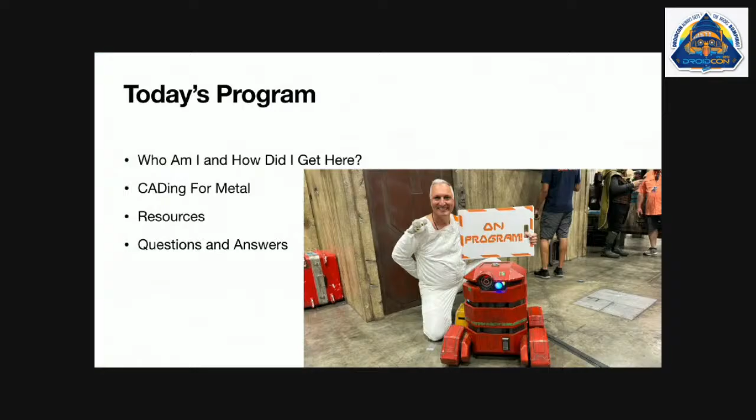All right. So for today's festivities, welcome to DroidCon. Here's what we're going to talk about. Who am I? How did I get here? A little short story just for context in case you don't know who I am. Then we're going to talk about CADing for metal. And then we'll talk about a few resources, and I'll open up for questions. So check your Yelp reviews.

So I started building droids back in 2018. 25 years in the Air Force. I'm currently flying for United Airlines. No affiliation with either of those two organizations, but I've got no business building and creating and designing droids. I have no background in it at all. And I say that because if you are a mechanical engineer and the stuff I'm saying up here doesn't make sense, that's not my fault.

But in the same breath, my message there is if you put your nose to the grindstone, you can learn the essential tools necessary to create your own designs. Don't be intimidated by the fact that you don't know how to do it. When I go to schools, I have 3 messages. I'm curious, I'm not afraid to make mistakes, and I don't give up. So if you apply those 3 facilities to droid building, you can get where you want to go. And the last one is the most important, don't give up.

So try, fail, learn, move forward, ask questions. There's a great community out there to support this, and that's produced me here today as a non-expert talking as an expert. So a little bit about my history in droid building. When I started with 3D printed droids, I was a plastic guy, 100% plastic. And why? Because it was accessible and easy to do.

I built R2-D2, the gateway drug to droid building. I took them out to a convention, and it was so much fun that my wife was intending to go to seminars and shopping and all the things you do at conventions, and she couldn't stop watching. And on the way home, she said, next year I want my own droid. So next year, 2019, we built R5-D4, took it to the convention, and then my daughter, who's sitting back there, would steal one of our droids and disappear for hours. So we built Chopper, and then we're having a moment back there.

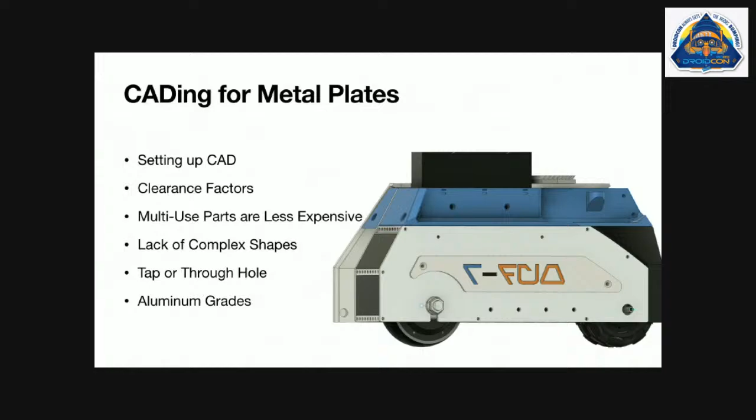So here's what we're going to talk about in the different phases of this. We've got setting up your CAD, and this is all going to be Fusion-centric, which is a very popular but not the only CAD software out there, SolidWorks. I'm sure there's analogs in that software that will apply to what I'm talking about, but some clearance factors that differ from plastic designs or any other material in manufacturing. Talk about making the most bang for your buck by making your parts extensible and reusable in different parts of your design, different characteristics of what parts you can actually make in metal, when should you tap or through hole, and just a little bit of what types of metal should you use or can you use.

And so that's kind of the overview of this next phase here. All right, so CAD setup for Fusion. I'll bring up Fusion here in a second, but I can't stress enough: the most important thing you want to do is make sure you're referencing the right thing.

When I start one of these designs, I have a master, this is the middle of everything. When I mirror, and you will mirror because there's a natural symmetry to droids. It's by definition symmetrical. So when you build something like this, this exact same part is the exact same part over here. Literally, you just build from the other side of it. So in all your designs, you're just designing one half of it, and then you mirror it for the other half. And make sure that plane is the same one every time, because otherwise you may end up with bad results.

I also recommend, and I'll show this in a second, setting up parameters. So when I build, I have chosen my metal thickness, and then I make that a parameter. So when I go to extrude that part, I type in AL for aluminum, and it comes up to 3.175 millimeters every time. That way I'm not making some of them different thicknesses. Again, you're trying to trap your errors in the initial setup.

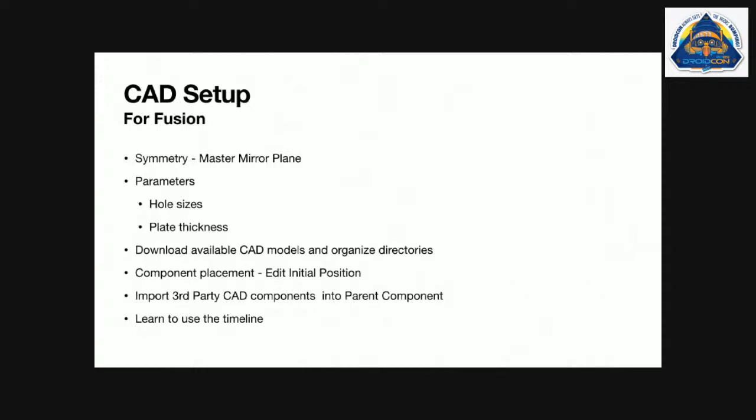Learn to use the timeline, and we'll talk about that here in a second. There's two basic modes of modeling in Fusion. One of them is direct modeling, where you just cut and extrude and go hog wild, and after a long time you end up with the shape you want, and shazam. The other way is to use a timeline where you start off with a drawing and extrude it, and you can go back and reference those things, and if you change your mind, you can change those things. It's very powerful, but if you're not managing the timeline, you'll end up with a big, giant, twisty mess with a lot of errors in it. But that process takes time to learn.

Do it, because at the end of the day, I used to never use a timeline. Now I can't imagine not using the timeline, just because it gives me so much more power when I need to go back to this step and fix it without having to re-drill all those holes, and you just click it and whoop, it fixes itself. And you can also do that with the parameters as part of your build. So with that, let me pull up my Fusion screen.

Yes? Could you go to the component placement one? Yes, that's exactly what I'm going to talk about. So if you can switch over, let's make sure that's on. There we go.

So for component placement, there's multiple ways of putting stuff in space in Fusion in particular. One of them is a joint. Another way is to just simply move it. And the third way is edit the initial position. And of all three, that's the most powerful.

Because when you move something, it creates a move event in the timeline. And then if you subsequently move it again, it creates another move event. And then if you throw a joint on it, that'll capture a position. And next thing you know, that thing is locked down, and you don't know how it got locked, and you can't move it. And the way you avoid all that mess, I'll demonstrate here since we're on that question.

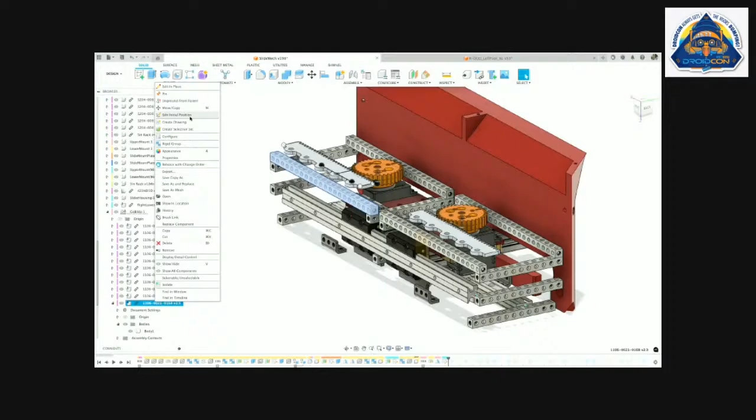So I right-click on it, and I go to Edit Initial Position. What it does is it brings up this Move Position dialog, and what I can do is move this piece and use all my alignment commands to line it up exactly where I want it to go. And then when I hit OK, when it loads in, that's where it expects it's supposed to be in space, where any other way of getting it there is malleable and rife with chance for errors.

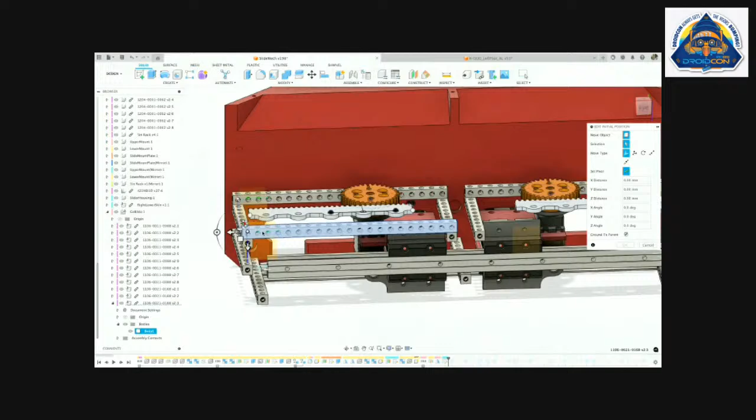And I would spend many iterations moving these bars so they're all perfectly lined up with each other. I'll just demonstrate a quick move here. So what you do is you're going to set your pivot point. You're going to set what part of the geometry you want to focus on. In this case, let's focus on this corner here. Come back and hit the check mark. And now when I slide this around, it's in relationship to that corner.

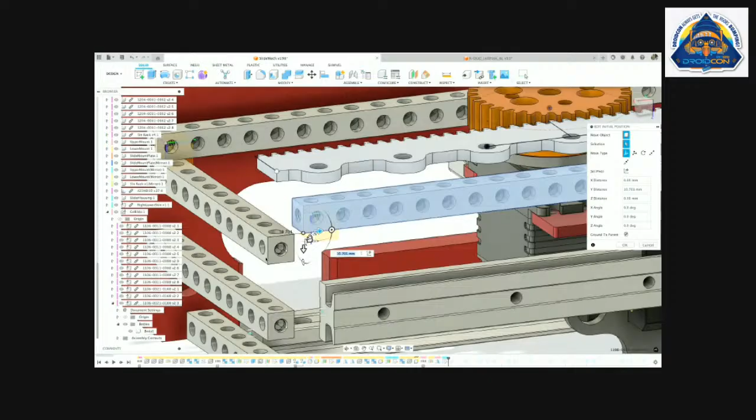And if I want that corner to be perfectly lined up with this face, I got a little dialog box there. Let me just go back. I had that little miss. So if I wanted to line up with, why is it not lining up? Well, I'll just pick another face since it's not playing. It snaps to that face.

And when you do it this way, you can take your first block and stack them into space and make sure that the holes line up. You don't want close to being right, you want exactly right. And you have to be meticulous about that. And the magic of the timeline is if I get one wrong or I change my mind of where that piece is supposed to go, I go back to Edit Initial Position. It automatically rolls the timeline back to when that part was first inserted, and you change it.

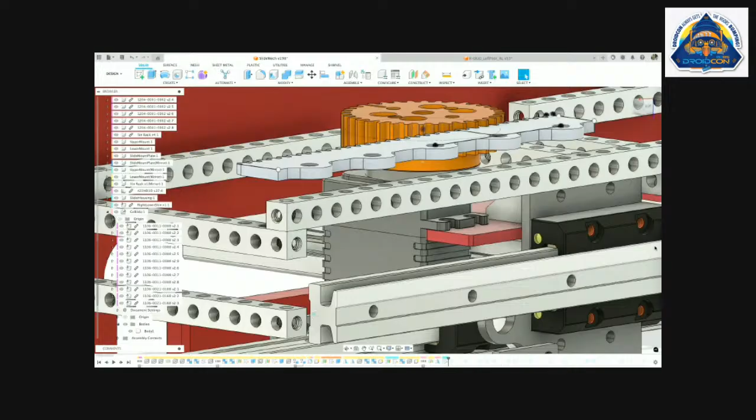And sometimes you may think, oh, I need to base it on a part that I put in later. You can drag when you insert that part in the timeline back before the other one, as long as there's not a relationship locking them. You can just slide those parts around until you can build a competent structure. So we'll go back over what I was talking about in the parameters and the symmetry, I'll demonstrate that, and then we'll move on to the next part.

So for your master mirror plane, if you're savvy enough to start your project in such a way that you can use the origin, that's the best one because it's the origin. And I recommend using that. A lot of people fall into the trap of building their project off of the origin without relation. If you're not thinking about this all going to be mirrored, you build it in a place like half the distance away from where you think it should be. And again, if you need to change it, Edit Initial Position, move all those things into the right spot, and that gives you a good solid foundation to build the rest of your design off of.

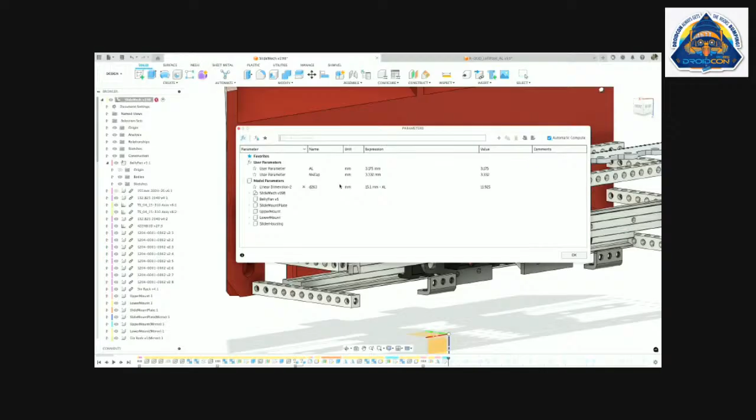So parameters, if you go to Modify and go to Change Parameters, you can set way too many parameters, but I've got just two as an example here. I've got aluminum, and I've got my M4 tap size, because as we'll see later, what clearance is used for different bolt holes and bolt sizes. The tapped ones are the critical ones, because that's the size you're going to tap when you want to screw a bolt into a piece of metal and not have another nut on the other side. Anytime you can use a tap in your design, that's great, because you don't have to have another component to catch the other side of that screw.

And that can really streamline your parts and your build if you make the metal plate do the work of that fastener for you. It has limits. You can't over torque it. You can strip it out and all those things. But if you use that, it will help you in the long run. And then we talked about plate thickness.

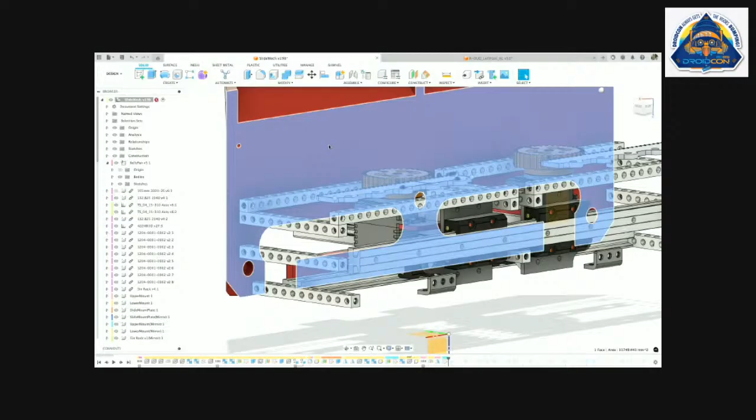So let's say for example, I wanted to make this an aluminum plate. Any sketch will do, but you can also go off a surface. I hit the extrude key, and then for distance, I'm going to type AL. And you can see it automatically populates 3.175. Because 3.175 is kind of hard to type, sometimes you might type 3.715, you might type .125, which is an eighth of an inch. It's easy to make that number wrong when you're typing it thousands of times. So put it as a parameter and lock it in with the right value, and that will save you a lot of work in the long run, because most of CAD is error trapping and correction.

This is becoming a good meme.

He doesn't have that sound. Is he really? There's definitely Bluetooth interference going on because Steve made that same sound and he doesn't have it. Yeah, he doesn't have that sound. We got the same. There's a plug. Just unplug B from the Arduino from the wall. He will go silent. That's crazy. My droid has been infected by the dark side.

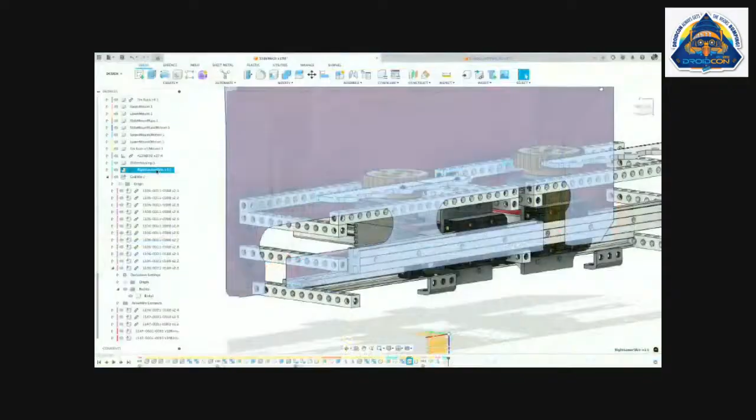So in this build, you notice I have my goBILDA component, and when I brought these CAD parts in, what I did is I activated this component. And why can't I activate the component? What mode am I in? Which version of CAD are you using?

The free version or? I pay for the subscription only because I write software as another alter ego, and if somebody does something that I like and I want to support, I pay for it. I pay for like the $300 a year version of it or whatever. Nothing that I'm using is any of the pro features. I don't use any of the pay for features. I'm not using any of the team stuff, and I don't think I'm using any of the features that aren't available in the free version. So yes, I pay for it, but no, I'm not doing anything magic or not available to the public in a free version.

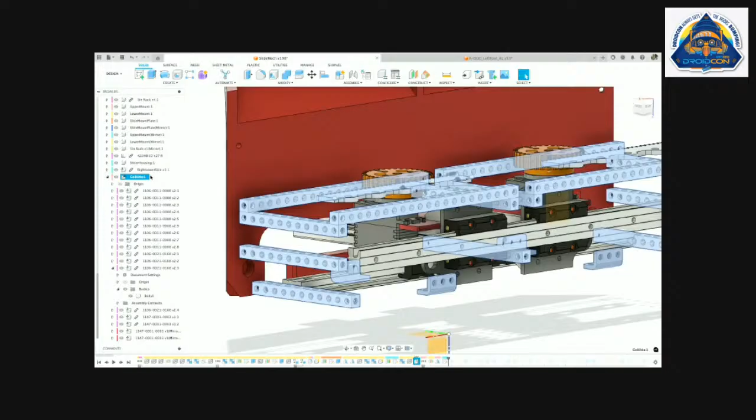I'm in some mode. Normally what you do is you right click, you click this and a little dot shows up. Here's the dot I'm looking for, but that's irrelevant. Basically you activate the component, and anytime you bring that active component in, all those components will come into that active component versus the main project. Oh, there it is. There's a little dot. Why can't I click it? It keeps going away. Anyway, what I was trying to show is you can grab those and treat them all as a single unit. So once you're done figuring out where those parts go, you can hide them when you're working on other aspects of your design if you group them reasonably.

One more thing about the timeline and the components. Each component has its own timeline chunk. So if I go to the master project, I've got 400 lines in the whole project. But if I select an active component, it's still the same list, but it's just a subset of what applies to that component. So it makes managing components way easier in the timeline when you work on a component level of design. And components can have subcomponents. So when you're drilling down to work on just that one little doohickey, activate it, and then this timeline will be like 5 or 6 or 8 cells versus 25 or 40 where it's easy to get lost. So that's kind of a pro tip on how to manage your timeline, is to work at the component level.

And the mistake is forgetting to activate the component, and that step now falls in the master timeline, and that can make things tricky. But the other thing with a timeline, anytime you find a little yellow or red, don't ignore it. Find out why. Usually it's a sketch that was constrained inappropriately, and you moved or deleted something that sketch was trying to find, and now it's complaining. It caches it. It knows what you did before, but it doesn't know what happened to its information. So you basically lost your ability to do parametric timeline-based functions when you have a little error or fault in there.

Sometimes you can complete the project, but if you're going to learn to use the timeline, troubleshoot all those errors, and it will tell you what it's complaining about. And you can actually go in a sketch, and it'll say restore lost references, and you can click and regenerate them all. But don't ignore those warnings, otherwise you will be in timeline hell, and you'll curse me for suggesting even using it.

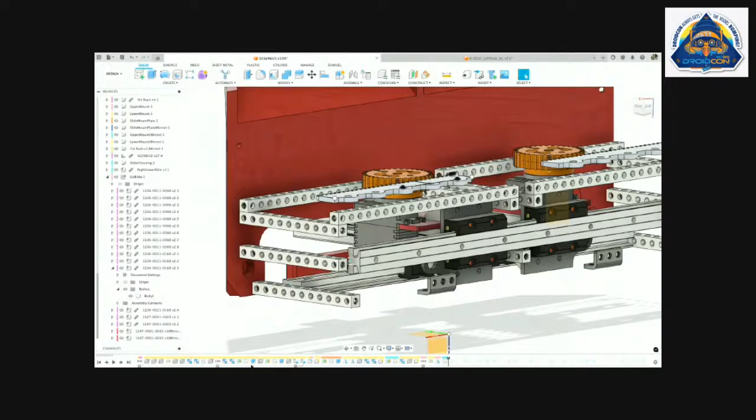Let's see. We can switch back to the iPad. Okay, so other things to consider for designing in metal, and specifically metal plates.

Clearances. Lasers are accurate. If you want a 4mm hole, you draw a 4mm hole and it comes out 4mm, and so that will automatically fit an M4 bolt. Easy peasy, it's like magic. Well, when I was dealing with plastic, if I wanted a 4mm hole, I had to make it a 4.2mm hole or 4.3, depending on the nozzle size, and or how bad my printer was or how good my printer was. So it was very much dependent on where this part was going and what it was designed for. Whereas when I'm dealing with metal, it's going to be the size you expected it within machine tolerances. And so that's an actual joy, a burden lifted off.

You can design with zero clearance. If you want this plate 125mm from this plate, you don't have to put in a little fudge factor for them joining together like you do in plastic, like 0.2mm or whatever. It just joins and fits.

So how do you know how to make your threaded holes or your tapped holes? There's a simple formula for metric, and I rue anybody who doesn't use metric for design. I know there's a lot of Imperial stuff at Ace Hardware that you can buy, but please make your life easier. Use metric in designs. It's much more simple to comprehend. You know, which is bigger, 5/32 or 19/24? You can probably figure that one out. But I know M3 is smaller than M4.

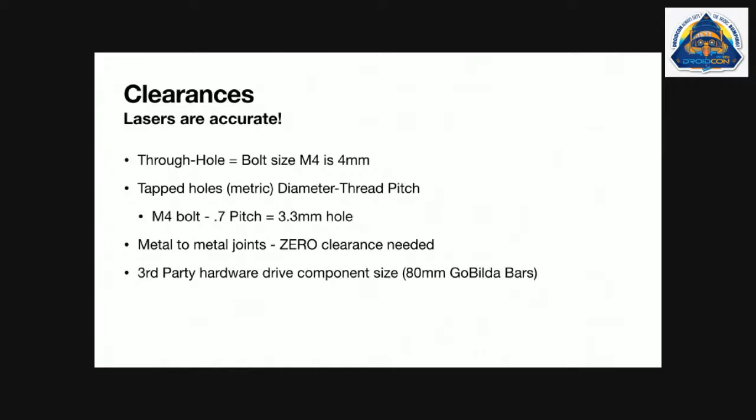One thing that's important is in metal plates, we're not building a 3D structure. We're basically building a 2D structure that we're going to make into a 3D structure with something else. The something else could be another plate. Or it could be a 3D printed box that we're going to capture with metal plates. Whatever it is, I chose in this design to use the GoBilda bars. They're 8mm by 8mm with holes every 8mm, and the ends are tapped. So they're perfect for building a box out of metal. And they come in all kinds of sizes.

And there's two ways of doing it. One is to take stock parts and build around that. That's what I chose to do. The other is to take a part, and if it's not quite right, cut it. I just don't like that, because those cuts are going to be inaccurate. It's just find the magic part in that 8mm catalog, and it might be 80mm is the perfect size to capture my motor, give it clearance, and have it sit. So there's a little bit of sleuthing required, but the message is try to take a stock part and have it do all the heavy lifting. Somebody else has designed that, and it's commercially off the shelf. You don't have to do that yourself.

You can, but what we're looking for, back to the accuracy thing, everything has to line up perfectly, and we have the platform to have everything line up perfectly, but as the designer, we can't just say, oh, that's close enough. When I position things, I'm typing the decimal points, or I'm having it auto perfectly line up using the align commands when I'm moving the components. Don't just go in there and freelance it, because it's going to cause you untold troubles and errors, and things just won't line up and you can't assemble it.

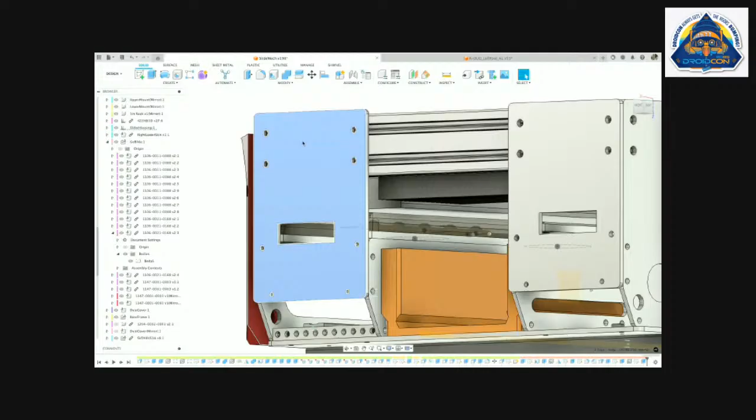So don't just randomly throw this much clearance from here to here, this hole spacing. When you design that sketch, constrain how far it is away from the edge. And we'll talk a little bit about how close you can get to the edge, and that's depending on the manufacturer, what they can do for you. And then make sure that the other hole is that far from the edge, so when you flip it, you truly have symmetry available to you in your build. Let's see what else we got here.

Sketch constraints. Here's a fun fact. When you're in Fusion, if your sketch is fully constrained, all the lines are black. If it's not constrained, it's blue. So if you look at your sketch and all the lines are blue, you're not done. When you're done with that sketch, it's all black. Meaning that when I change my mind later and I decide I'm going to use, say, an M5 screw, that distance will programmatically still be correct with the M5 screw because the sketch was constrained. If not, that hole can float. So have fully constrained sketches.

It's kind of, I won't say an art form, but it's not always easy to do, just because you think you're constraining it and you're not. There's an auto constrain using AI that Fusion has added. I've never played with it, but if you're having troubles, maybe that'll help. I don't know.

So there's limits to what metal can do. They can only make it so thin, and they can only cut so close to the edge. All those will be on the manufacturer's website. I'll show you in a minute SendCutSend's design criteria. It's based on the material you're using and the thickness and all those things. They've got a little spreadsheet or blog that tells you all those things. But take a look at that first so you're not creating things that are unmakeable. All right, so let's go back to the iPad.

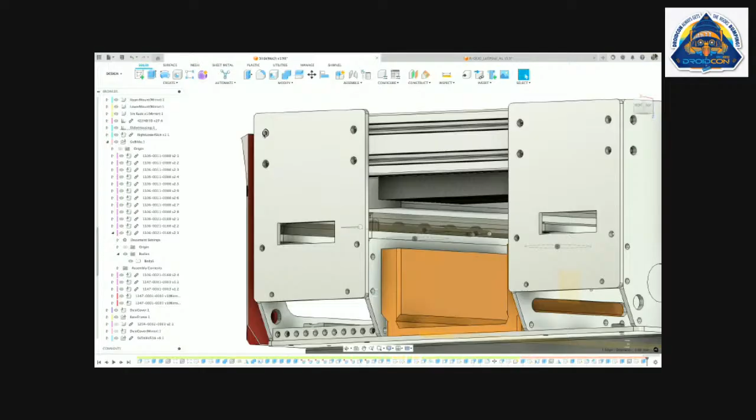So in this design, I start off with this metal base, a box that runs the length of the droid, and I wanted to control and hold on to these wheels in that box. And then as I finish that, well, now I need to go up. And as I go up, my lever gets bigger, and my twisting forces get bigger because now I'm acting on the base further away from it. So I grab that plate here and here and here. And so the corner of my box is all secure. And then as I go up, I grab onto it 4 more times so that part can't sway. And then I go around the corner and do the same thing.

So think in reinforcing in 3 dimensions since you don't have a unibody plastic structure that can do that for you. You can optimize it, but I like to grab onto things at least 4 times, just in general. Sometimes there's no space for it. Sometimes you can only do 2 or 3. If you're only doing 1, I would say you need to rethink it a little bit, because they can pivot. So strap everything down as best you can.

All right, back to the iPad. All right, optimize your designs. Even though it seems complex, simple is best. If you can use a single part to span and do 2 jobs for you, like I've done in that last example with that plate, do that and try to keep things simple.

That's a tall order, hard to do. It's easy to get tangled, but most of my design work is not clicking the mouse or typing. It's just staring at it and going, what? Just mull it over. It takes time to really understand the impact of your design, understand what is the simplest shape that will do the job I'm trying to do. And just in your mind, imagine a bunch of those before you even start clicking on anything, and then start clicking on stuff and trying it out, is what I would recommend.

Use 90-degree angles, because basically when we're doing metal, it's naturally got that symmetry and naturally wants to be 90 degrees to each other. If you're doing something more complicated, now so must your designs be more complicated, because now you might need to add half corners around it, and your parts count goes up, your design goes up, your complexity.

I would look at this as mostly structural stuff, and I'm going to skin it with other materials, plastics or whatever. So at the heart of it, I want boxes that I can build, and boxes are easy to build because there's a lot of 90-degree stock out there. If that won't work for you, sometimes you have to go 45 degrees or 30, but that just complicates your life. If you can avoid using complex angles, I would recommend it.

And another fun thing is, back to my core design principle, you don't have to use all metal. So I designed these motor mount boxes as these really strong, rigid metal boxes with all the bars inside, and they're all lined up perfectly. And I let Brian Dodds build my design before it was done. He goes, Tim, you can just put a 3D printed core in there, slap the metal plates on it, it's just as strong. You're not going to be able to break it. You're right.

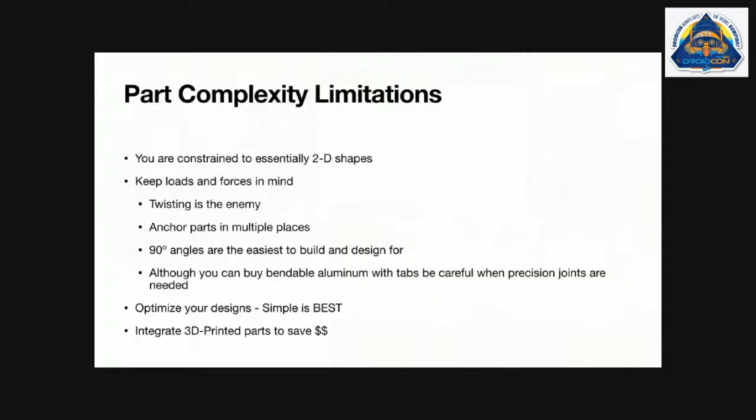I got locked into my own trap of getting away from plastic when I could save a lot of money because of 1, 2, 3, 4, 6, 12 plates I didn't have to buy. I could just 3D print a metal box. And even with this design, there's a 3D printed part in there to act as a wheel well, so I don't get junk and debris and stuff inside the motor. So I have a 3D printed wheel well, but it's in a fully metal box, and I could have done, keeping it simple, both of those tasks with a single 3D printed core and the same metal structure. So that's the optimized design. Use the right material, the right tools.

So tap hole versus through hole. I'll show you a couple of designs, like I'll upload one to their website just to show you the interface. But you really, really have to pay attention to your hole sizes, and it's super easy to screw it up. You will find missing holes. You will find wrong size holes, unneeded holes, misplaced holes. So I recommend print all these parts out and put it together, because in CAD, I can have a bolt through a solid surface, and it's not going to complain, and it's going to look perfect. It's right where it should be.

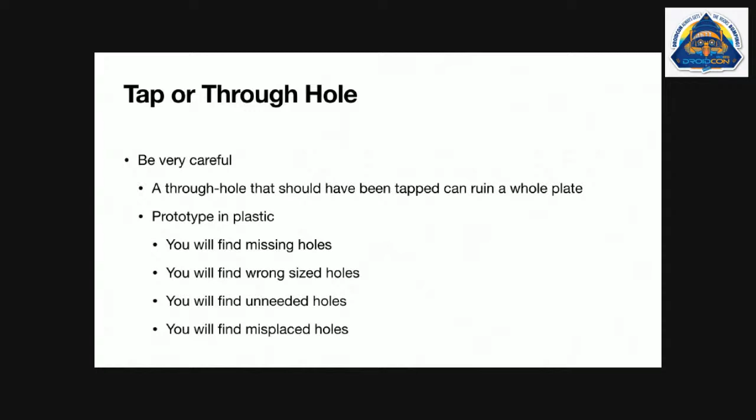And when you print it out, like, oh, I never drilled that hole. I never cut that hole. It got missed in that step. So you can roll your timeline back, include that hole in the cut, and then you're fixed. So use the timeline. But definitely prototype. I even 3D printed the 2020 extrusions, because it will really inform you as to how it goes together. You get one practice build out of it.

And you also get the advantage of, oh, I can't even put this together. I can't get the screwdriver or the bolt driver in there, or it's physically constrained by its own build. So you'll find those things, because CAD's very evil. It won't tell you when you're making a big mistake and you can't assemble the thing you just created. So before you ever send it off to get cut in metal, print it out. If you don't have a printer, they're $300. How do you manage tolerances, right?

You just talked about designing everything to metal. Those need basically no tolerance, and then you go print in plastic. Well, I will take that into account, that it may not go together perfectly, but really those errors are what I'm trapping: the assemblability of it, and are the holes approximately in the right place. I don't expect it to be structural or usable; it's really just an assembly exercise.

And that assembly informs you how it goes together, order of operations, missing or lost holes, or other things, like you may need an extra wide cutout because when you build it, you need a little space to put the parts in. So you use common sense. Yeah, keeping it simple, it's a gross error check before you spend on an actual check.

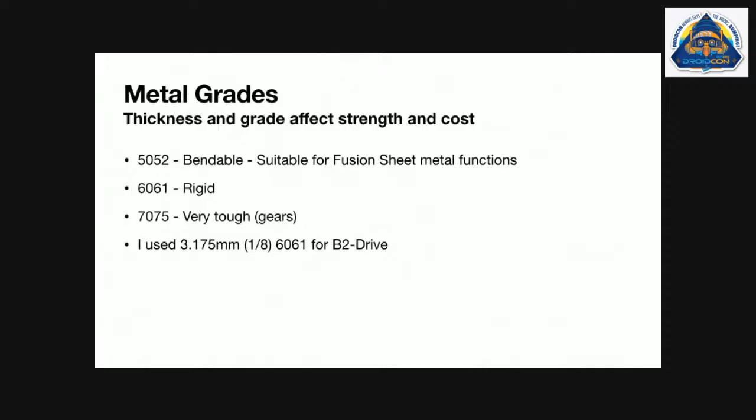So 5052 is that bendable metal, and the rigid 6061, that's what this all is. It's a nice firm metal that has good strength and flex capabilities. And then the uber aluminum is 7075. These gears are milled in 7075. I haven't talked about CNC milling, but you can also do those things. You can now design in 3D, but that's a whole different topic.

So this is the super tough, mid-grade strong enough, and bendable. Maybe you can use it; I avoid it. And I used the 1/8 inch aluminum for all this. You can tap it effectively. You can't torque it down, but you can tap and tighten that grade of aluminum at 1/8 of an inch. You can also go to 1/4 inch and thicker.

So depending on what you're building and how strong it needs to be, you can use titanium if you want, or fiberglass, or carbon fiber, all kinds of materials that you can have this process done with. I just applied it to 1/8 inch aluminum as a framework of where I started this journey. It literally can take you anywhere, but I just want to constrain it. Boop, beep.

So resources: SendCutSend is a place in the States where you can upload a DXF, which is just a 2D drawing, or a STEP file, a 3D file, which I recommend because it auto imports your thickness, so you don't end up clicking the wrong button and getting the wrong size part. goBILDA has a catalog of almost purpose-built little aluminum bars that really make your life easy: a through hole, tap into the end. It's built for making boxes.